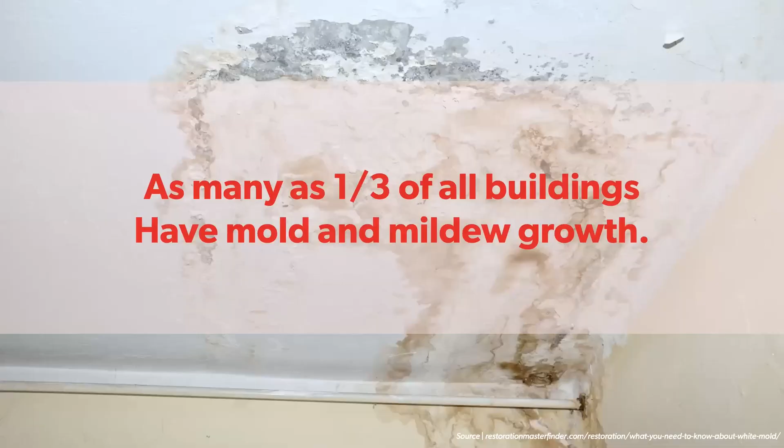Let's start by talking about where we stand with our buildings across Canada. Canadians, similar to most people in developed countries, are going to spend a lot more time indoors every year. More of our lives are lived inside buildings, and these buildings are really powerful shapers of how we live our lives, as well as things like our health and our well-being.

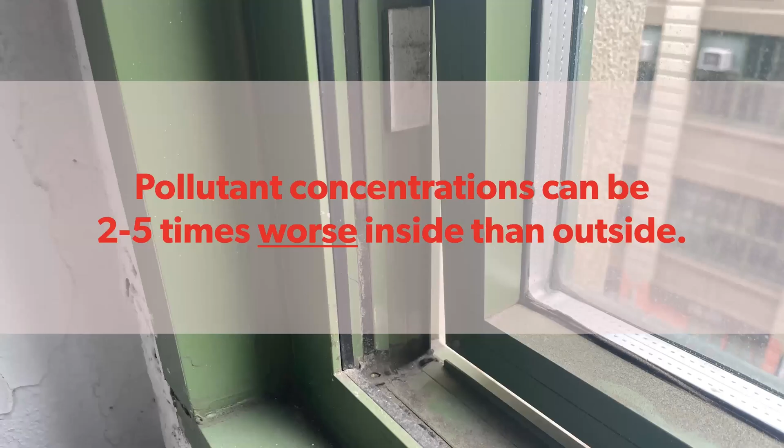Unfortunately, a lot of these existing buildings have a lot of problems. For instance, as many as a third of all buildings in North America have some mold and mildew problem. This is going to seriously harm the health of the occupants over time. Additionally, we normally think of our buildings as protection from the outdoors, but some studies have found that pollutant concentrations indoors can be maybe 2 to 5 times worse than outside, again seriously damaging the long-term health of the occupants of our buildings.

Sadly, more and more it's the case that the outdoor environment is also getting more challenging. In many parts of the country, pollutant levels outdoors are only going to make this health situation worse. Whether we're talking about industrial air pollution or smoke from wildfires, increasingly what we're seeing is that huge areas of Canada no longer have high quality outdoor air to help temper these indoor pollutant issues that we run into.

So we have lots of health problems, we know that, both inside and outside our buildings. We also know that far too many of our buildings are really terrible places to spend a cold winter or a hot summer, whether it's due to a lack of basic insulation and air sealing, or an old and inefficient heating and cooling system. Most people who've looked at this have found that as many as two out of every three homes in Canada report at least one room which is too hot in summer or too cold in winter, which is, I'm sure, not a surprise to anyone on this call.

Certainly, it's something that most of us have lived through. In my own experience down here in New York City, I lived on the top floor of a 4-story walk-up row house built in the early 1900s, a perfectly nice place. But of course, there's not a stitch of insulation in the roof. So when I come home on a hot, sunny summer day, the ceiling of my apartment is hot to the touch. It makes it incredibly unpleasant to be in that space and increases my air conditioning energy consumption. I'm sure many of us on the call here could tell similar stories.

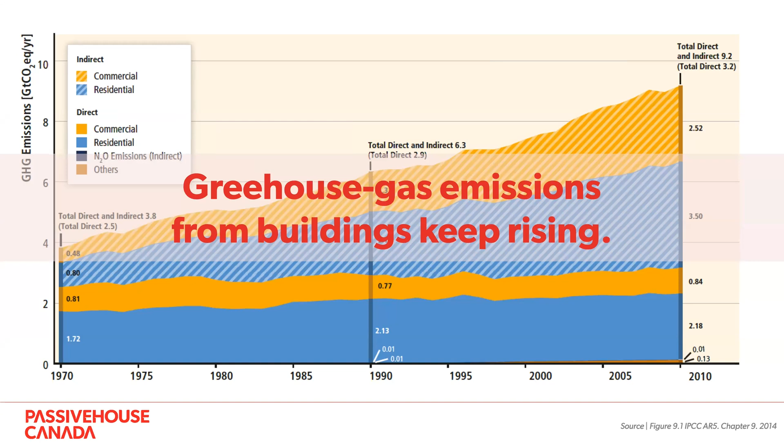So we have unhealthy buildings, uncomfortable buildings, vulnerable buildings, climate issues around our buildings, energy issues around our buildings, affordability issues around our buildings. Given all that, I think it's clear that Canadians deserve better buildings than the ones that we have. It's up to us in the building industry to help improve building performance in terms of health, durability, comfort, resilience. And the question those of us working in the high performance building sector have to wrestle with is: how do we do all that? How do we build these better buildings that are healthier, more comfortable, more durable, and eliminate carbon emissions from our buildings, all at the same time?

Now, luckily for us, we have some really fantastic technologies available to us as building professionals, whether we're architects, engineers, builders, or owners, that can help us deliver buildings which achieve exactly these results. So over the remainder of this session, we're going to take a look at a few different tools, techniques, and examples of some successful buildings which have achieved exactly the improvements that I've outlined already.

So let's start by talking a little bit about this passive house standard, what it is, what it means, and how we use it here in Canada and how it fits into this question. Now, the term passive house might be a new term to a lot of folks on the call, and it's worth taking a minute and talking about what we mean when we use that term.

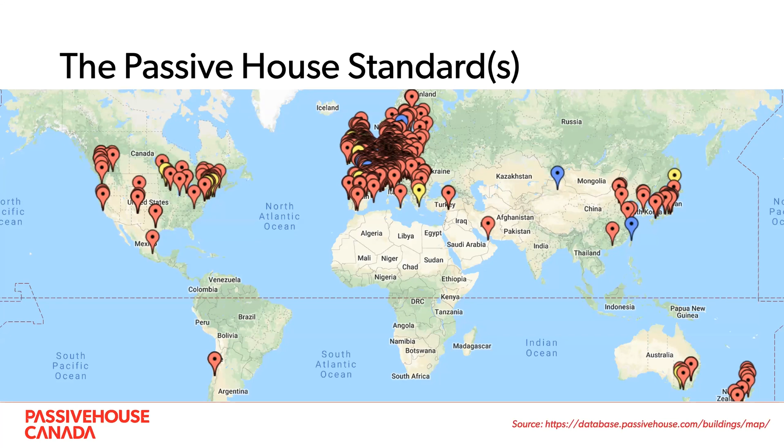Now, as a specific green building certification available for people, products, and buildings, the passive house standard has been successfully deployed on tens of thousands of projects around the world for 20, 30 years or so. The standard began in the early 1990s in Central Europe, and it's grown pretty rapidly worldwide since then. And here in Canada, we have a pretty vibrant passive house sector, mostly focused around the coasts, as you would imagine, but certainly expanding rapidly.

Now, as I said, the passive house standard can be applied to buildings, to people, and to products, and all of these different certifications are developed and overseen by a group known as the Passive House Institute, headquartered in Darmstadt, Germany. The certification, or the standard, is a worldwide global standard which can be applied to professionals, or individual building components like windows or ventilation systems, or whole buildings in any climate around the world. Now, we're here today to talk a little bit in depth about the retrofit standards that apply to these passive house buildings. So when it comes to buildings, the passive house standard has a tiered approach.

You can certify as any different type, either classic, plus, or premium, based on the energy performance of your building. That's for new construction. And then there's a whole specific retrofit certification which has been developed over the years to allow for the design, engineering, and certification of retrofit or rehabilitation of existing buildings. This is known as EnerPHit.

That sort of 'energy retrofit,' I think, was the original name—a portmanteau of energy and retrofit. It has been developed over the last 15 years or so with a whole host of specific tools and methodologies which are really helpful for those of us working in the retrofit sector.

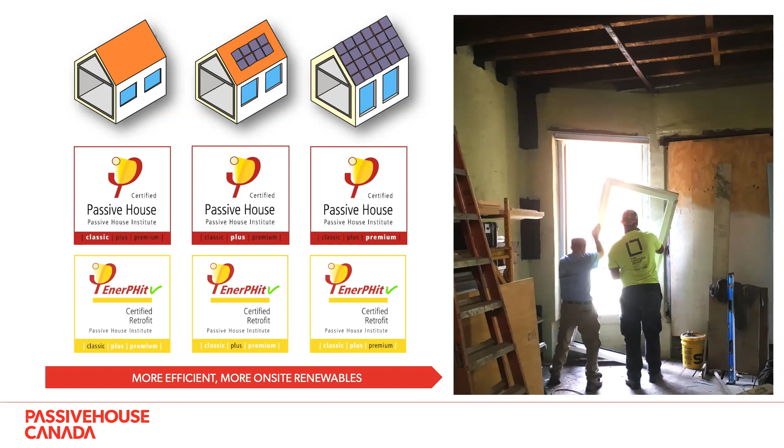We know we have a problem with our existing buildings, and we know there is this thing called the passive house standard with a retrofit approach. But what are the specific solutions a passive house building applies to take it from a basic existing building to a high performance, comfortable, durable, healthy, low energy passive house retrofit? We're going to use 5 basic strategies.

These 5 basic strategies are the same no matter what type of building we're attacking: insulation, air tightness, reducing thermal bridging, high quality windows and doors, and a dedicated ventilation system with heat recovery. This will be complemented by a 6th point, a high efficiency heating and cooling system, but today we're going to focus on those first 5.

We're really talking about the so-called passive elements of the building envelope. These are things that aren't going to break over time, aren't going to wear out—if designed correctly and built in, they'll just work for the life of the building. So we'll look at each in turn, but let's start with insulation.

I know what you're thinking—it's a perfectly nice day and here I am on a Zoom call talking about insulation. Not a very sexy or exciting topic, but the reality is insulation is probably the single most effective tool we have for improving the comfort and energy performance of our buildings. In passive house buildings, we use high levels of continuous insulation around the entire building, and that's no different for retrofits.

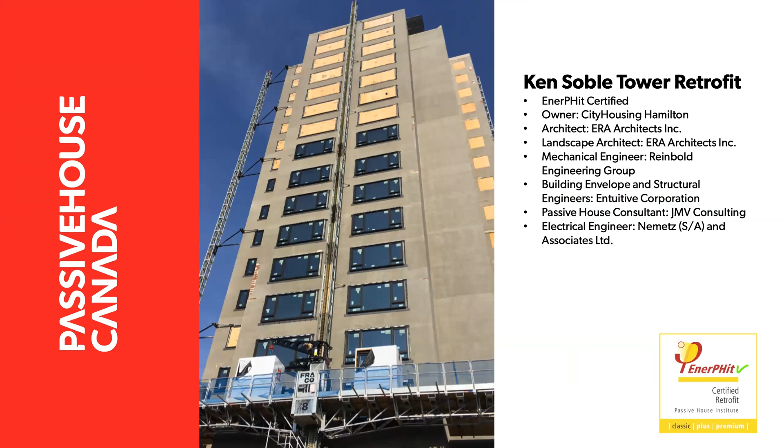This is a good example of a passive house retrofit: the Ken Soble Tower retrofit in Hamilton, Ontario. Here you can see the building under construction. This existing building is a great example of the type of thing we need throughout Canada—an 18-story building built in 1967, with terrible performance in terms of health, comfort, and energy, but a valuable existing asset that needs to be preserved, a piece of the community. How can we turn this into a building that actually serves its occupants well?

Well, they did just that in 2020—fully rehabilitated this building to the passive house standard. They replaced the primary elements of the facade with high quality components, replaced the mechanical and ventilation systems, and delivered a healthy, comfortable, low energy building. One of the key pieces of that strategy was to completely wrap the existing building in a thick layer of new insulation.

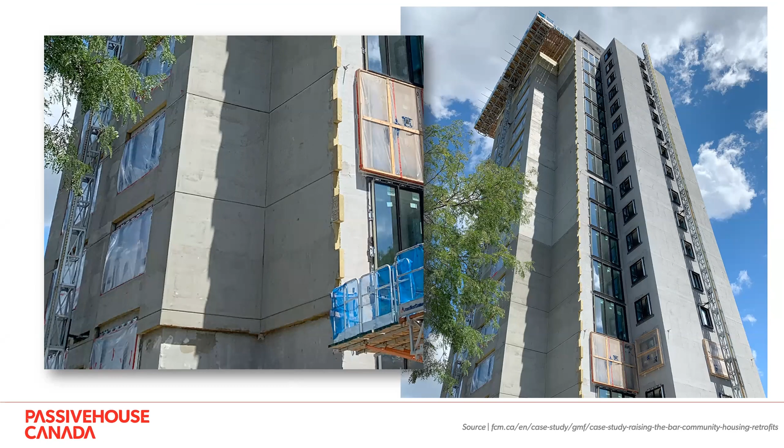Of course, this approach isn't going to be appropriate for every building—if you have a heritage facade you need to maintain, you're not going to wrap it in a new layer of foam insulation. But Canada has lots of buildings just like this one with completely unremarkable facades, which can easily be wrapped with a new layer of insulation, waterproofing, air sealing, and finish. This approach is core to any passive house mitigation or retrofit we undertake.

Now in Canada, when we insulate, insulation has to be paired with air tightness. And the primary role of air tightness in all of our buildings is to preserve the durability of the building. We want to make sure that we never have warm, moist air coming in contact with a cold, condensing surface. We want to make sure we never have any mold or mildew issues, or any health problems inside the building. So air tightness is going to be a critical piece of that effort.

Now, air tightness can be implemented on buildings in any number of different ways. And building an airtight building is really a team sport, as it were. It requires a combination of the specifiers, the product manufacturers, the designers, the detailers, and the builders all working together to make sure that they have the right products, that the products are being put together correctly using the correct applications, that the builders understand how to use those products, and that it's all done well. But you can use all sorts of different specific products in order to achieve air tightness. It just requires that the team select one set of products and then detail the building correctly.

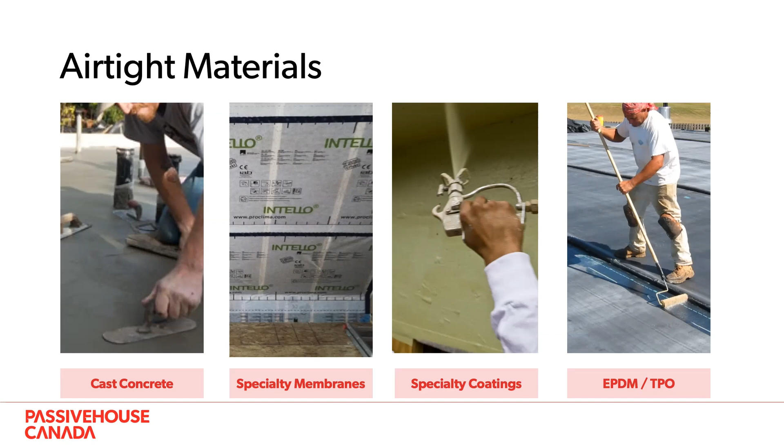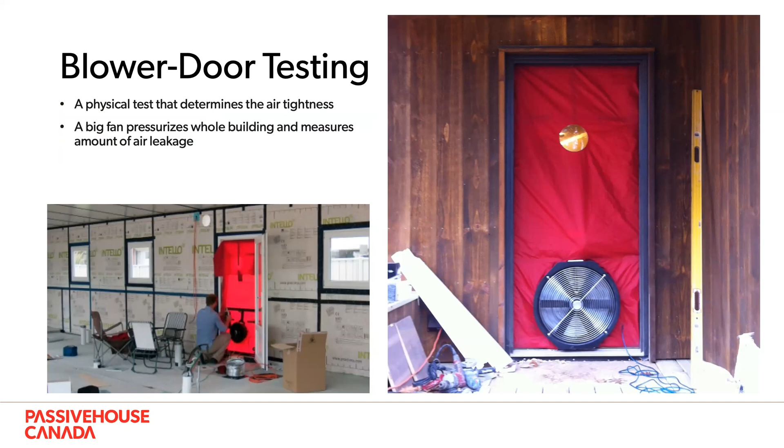In passive house world, though, it should be noted that air tightness is something which is verified. In typical scenarios, we might say we build airtight. Some building codes require us to meet certain airtightness levels in our buildings, but it's been very rare historically for those building codes to require any testing or verification. Now, the passive house approach is very different. We're going to mandate or require that the building is actually tested after it's built. So when it comes to airtightness, you're going to have to prove it. You're going to have to actually show that you did build the building that you said you were going to build. So we're going to insulate the building. We're going to build airtight.

Once we've done that, we're going to turn our attention to something called thermal bridges. Now, thermal bridges is a weird term, probably a new term for a lot of folks. The short definition of a thermal bridge is anywhere that we have a break or a disruption in the insulation layer. Now, this can occur for all sorts of different reasons. Could be the parapet, which penetrates through the wall and roof insulation. Could be a cantilevered balcony, which penetrates through the wall insulation. Could be something like a roof drain or a plumbing drain. Could be any number of different elements which penetrate through the insulating layer of the building.

What are the implications of thermal bridges, and why do we want to remove them or design them out from our buildings? Well, the primary negative impacts that we see from thermal bridges are cold surfaces. And cold surfaces lead to both discomfort and a higher risk of mold growth. So anytime that we have a thermal bridge, we're at risk of mold and mildew, wet materials, and of course, discomfort in our occupants. Add to that the extra heat loss that we see as a result of these thermal bridges during the wintertime. And you can see why we want to focus so much of our attention on designing these aspects out of our buildings and using the right products to ensure that we can eliminate as many of these thermal bridges as we possibly can.

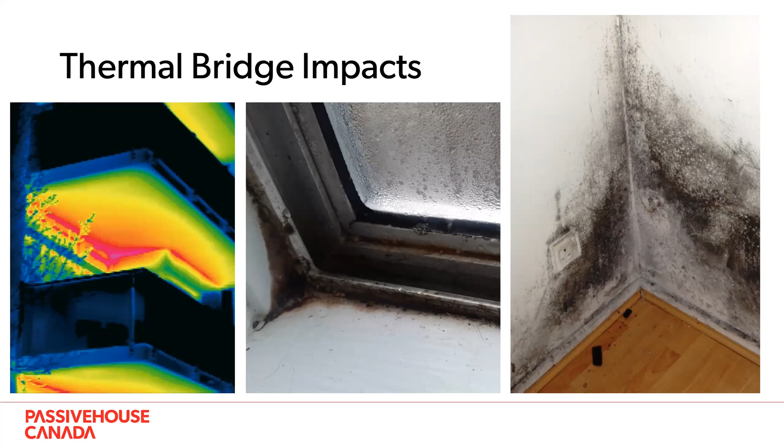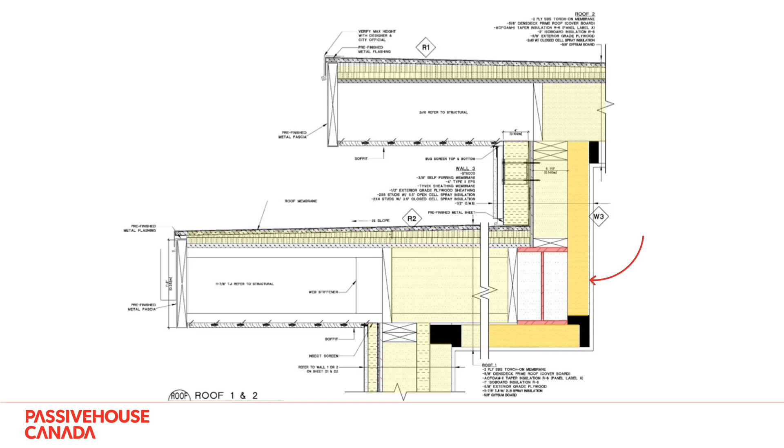So one of the things that characterizes passive house buildings is high levels of insulation in addition to their airtightness, and that's certainly obvious in this detail here. Now, the other thing we can say about thermal bridges when it comes to passive house design is that passive house designers are going to take a very careful and data-driven approach to mitigating and managing these thermal bridges.

Time was, we didn't have a lot of great tools for analyzing, simulating, and designing out these thermal bridges. Nowadays, with the advances in computation, that's not true. We have some amazing simulation tools, very easy for practitioners to get their hands on, which allow us to execute detailed heat flow simulations of all the details of our building and design out these thermal bridges from the get-go.

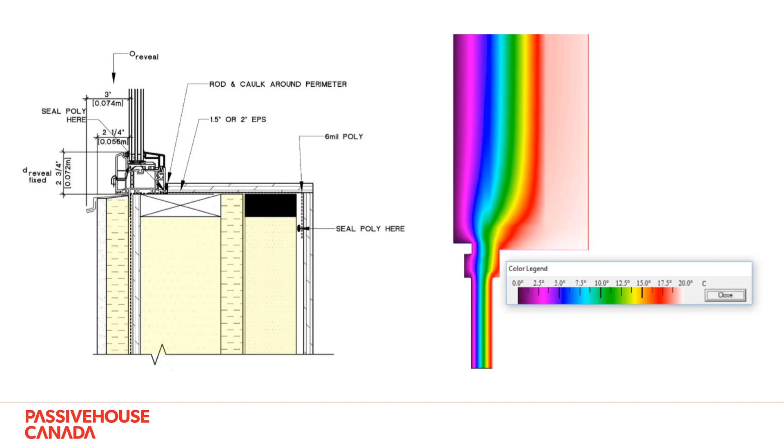What you see on the right-hand side there is a detailed false color image of the window installation situation of this project, and the colors show temperatures inside the wall as a result of a heat flow simulation. Using these tools, designers can figure out where the problems are and then mitigate them. We don't have to guess - we can use these technologies to figure out exactly where the problems are and make our buildings better.

Now that brings us to our fourth point here, which is windows - high performance windows. High performance windows are absolutely critical when it comes to designing passive house buildings, and retrofits are no different. So passive house windows, or passive house quality windows, are going to be absolutely required, and there's a few things that go into passive house level windows and doors on a project.

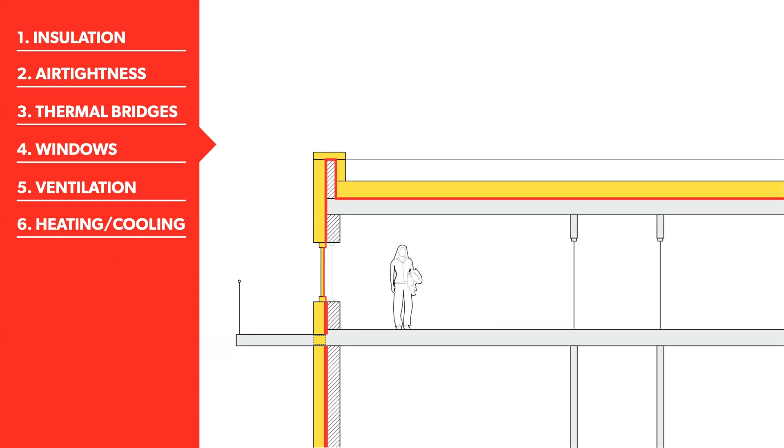If you've never seen a passive house level window, you might be a little surprised when you first come upon one. They're often quite a bit bigger than typical North American windows. They're going to be very highly insulated, very airtight, often featuring at least 3 levels of gasketing to ensure airtightness. They're going to be thermally broken, of course. And in most Canadian climates - maybe our friends in Vancouver, BC might be exempt from this - we're going to require triple glazing in order to achieve the performance levels we want out of our windows.

Now, in terms of the specific materials, there are passive house quality windows and doors made of aluminum, made of wood, made of PVC, made of fiberglass. It doesn't really matter - you can use any product under the sun so long as it meets the performance criteria.

One of the things we haven't talked about too much in regard to the passive house standard is that it's a performance-based standard. It is not a prescriptive standard - it's not a checklist of things you have to achieve. It's a performance-based approach: model the performance of the building, and so long as you're meeting your performance, you as the designer, specifier, or product supplier are allowed to use whatever methods, tools, or techniques you think are best for your building.

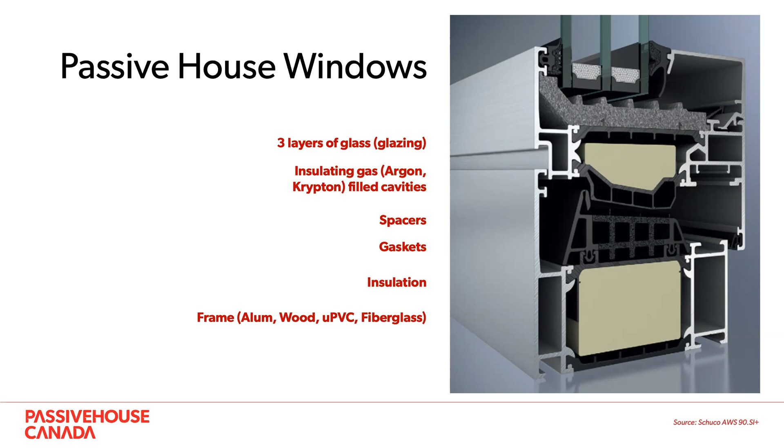This puts a lot of agency and control back in the hands of the designer. It puts a lot of responsibility in the hands of the designer, but puts a lot of agency back in the hands of the designer and builder as well.

Now, the other important thing about windows, again linked back to our performance-based approach, is the windows for a passive house building have to deliver thermal comfort. So they don't have to meet some specific level of some specific checklist, but they have to demonstrate that they can deliver thermal comfort passively to the occupants. And what that means, long and short of it, is that a window has to be good enough to maintain, let's say, an 18 degrees Celsius temperature on the interior face, even when it's really cold outside, let's say -12.

Now, for those of you in Winnipeg, that might not sound very cold, but for a lot of parts of Canada - think Toronto, think Vancouver - -12 might actually be quite challenging. And so in those conditions, our windows have to be good enough to passively deliver thermal comfort. What this means in practice is that what you don't see in passive houses is a bunch of radiators right underneath all the windows.

This is one of the other things that characterizes passive house buildings: tremendous freedom in heating and cooling distribution and system design. We do not have to put giant energy hog radiators right underneath all the windows to avoid condensation and discomfort when we design passive house buildings and use passive house level products like passive house windows and doors. So this is absolutely critical to a successful passive house building.

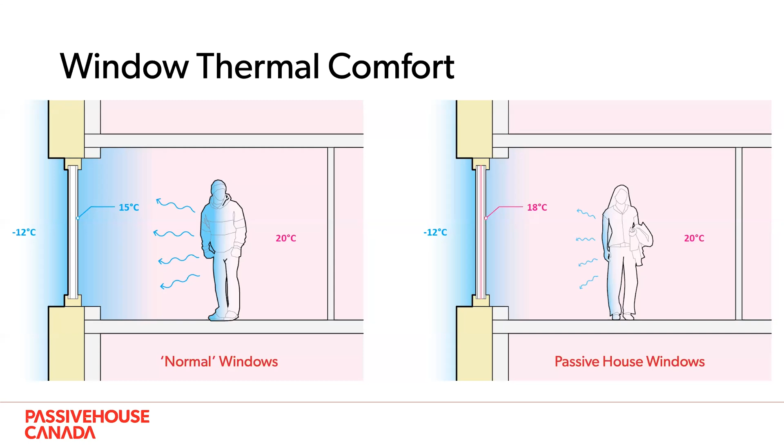Now, the last of our 5 points - insulation, air tightness, thermal bridges, windows - is ventilation. Ventilation, by my estimation, is probably one of the most important pieces of the puzzle when it comes to designing a healthy, modern 21st century building. What do we mean by ventilation? Well, let's talk a little bit about typical Canadian ventilation before we talk about passive house ventilation.

Maybe some of you on this call live in single family homes, maybe some of you live in apartments. But for those in single family homes, you might be familiar with a system like this one. So how do we get fresh air for people to breathe into most Canadian homes? We rely on a couple different mechanisms. First and foremost, we rely on the fact that most of our buildings are not built very well, so there's an awful lot of air leakage through the envelope, meaning we don't have to worry much about the volume of outdoor air coming into our building.

Now, as the air leaks through the envelope of your building and washes across desiccated bug parts and mouse feces and everything else, is that air clean by the time it gets to your lungs? Well, that's a whole different story, we can talk about that another day. But suffice to say there's plenty of airflow pathways for outdoor air to make its way into your home.

Now, you might also have some sort of outdoor air damper which feeds into your heating and cooling system, supplying some nominal amount of fresh air to the spaces, but only riding on that system. And then you might have an extract air system in the washrooms or kitchen, taking air out of those spaces and voiding it out of the building. So that's a very typical fresh air ventilation system for a Canadian or North American home - certainly we see plenty of this down here in New York State where I work.

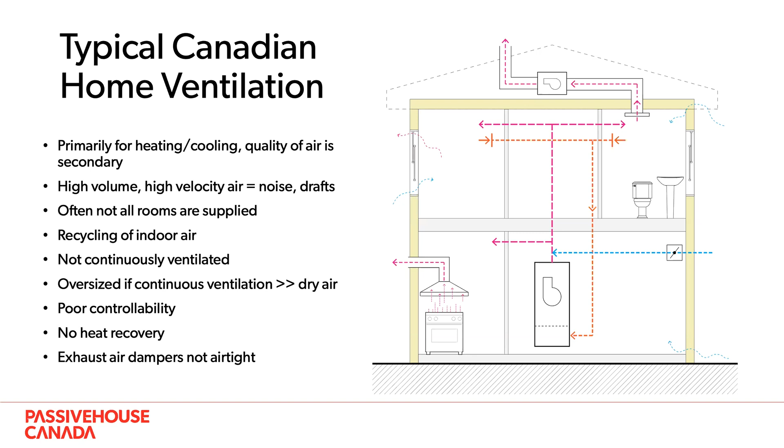Now, a passive house, by contrast, functions very, very differently. First of all, we have almost no air transmission across the envelope of the building. That means in wintertime, the cold air stays out and the warm air stays in. In summertime, the cold air stays in and the warm air stays out. We have a very airtight envelope.

And so we are going to use a mechanical ventilation supply - a machine to bring filtered, clean, fresh air into the building 24 hours a day, 7 days a week, 365 days a year. This same machine is going to extract stale air out of the home 24 hours a day, 365 days a year. What results when we configure, design and build a building this way is an incredibly healthy and comfortable home.

One where we have very, very high quality indoor air, constantly extracting pollutants out of the home and constantly filtering and supplying fresh air into all the main living spaces inside of the home. This approach leads to a much, much healthier interior environment for the people living inside of our building.

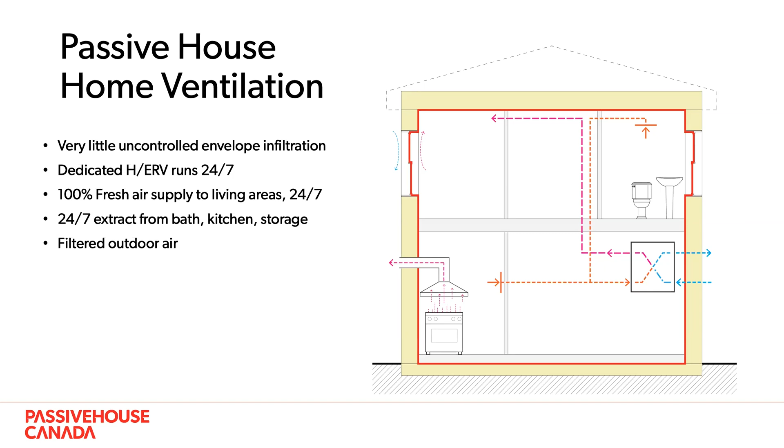It's also going to help improve building durability. It's going to reduce the likelihood of mold or moisture problems. It's going to radically change the way these buildings behave. Now, if you're not familiar with these machines, you soon will be - they're being written into virtually all northern climate building codes at this point. Certainly we're seeing this happening down in the States, and it's been code for quite a while in places like Ontario. These heat recovery or energy recovery ventilators are new gadgets.

They're new pieces of equipment that we're adding to these passive house homes. Now, these machines are not very fancy, they're in fact quite dumb - it's a foam box with a few fans in it and some high quality filters. All of the sophistication comes in two places: the controls, but more to the point, the heat recovery core of this machine allows us to take minus 12-degree air and bring it directly into the house 24 hours a day without paying an enormous energy or comfort penalty.

So this free heat recovery that happens inside of this machine is really where the magic happens. Other than that, it's actually quite a simple machine, but it is a new piece of equipment that needs to be added to these high performance modern homes that we're building here to the passive house standard.

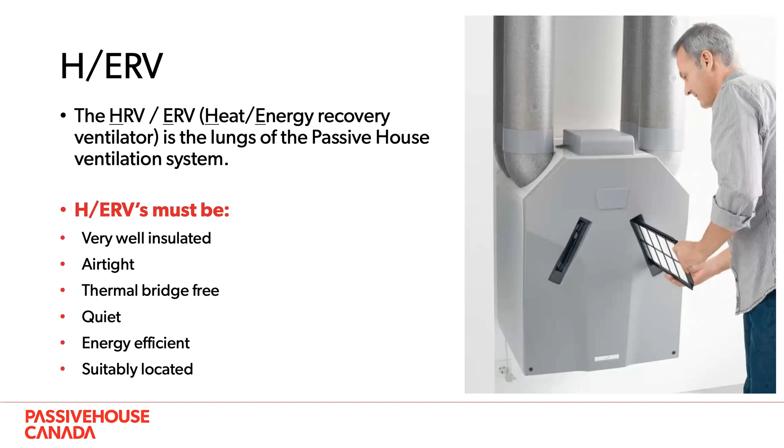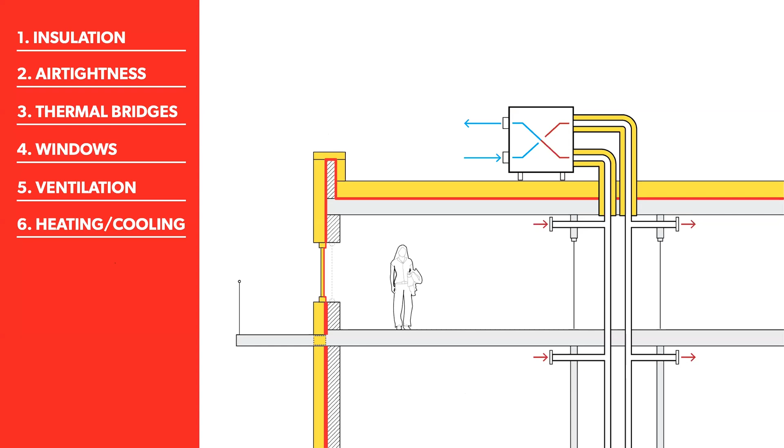So we put all those pieces together: we build an insulated building, we build it airtight, we design out all of those thermal bridges, we specify and install high performance windows and doors, and we add in a really high performance fresh air ventilation system. We complement that with a high performance heating and cooling system, and that's going to get us to that EnerPHit level of performance. So let's talk briefly about achieving that EnerPHit certification, and then we'll wrap up with plenty of time for questions and answers.

So how does one go about designing and engineering a successful EnerPHit project? Well, the first step is, as I noted earlier, to simulate the entire building performance. The passive house certification is a performance-based approach. It is not a checklist of things you have to do. You, as the architect, engineer, owner, specifier, are responsible for figuring out how to build the building.

This is one of the things I like most about the passive house approach: it allows me as the architect, as the engineer, to do what I think is best for the building. I'm not beholden or locked in to somebody else's notion of what a good high performance building is. There are very few, very clear, very hard limits on what it means to be a passive house. But so long as you achieve those, then you're a passive house, and you can achieve those in any number of different ways. But the way we validate that, the way we verify that, the way we design our buildings from the beginning, is by simulating the performance of the building.

And we're going to do that using a piece of software known as the PHPP, the Passive House Planning Package. It's a proprietary piece of software that we use to simulate the energy performance, thermal comfort, and durability of our building during the design phase.

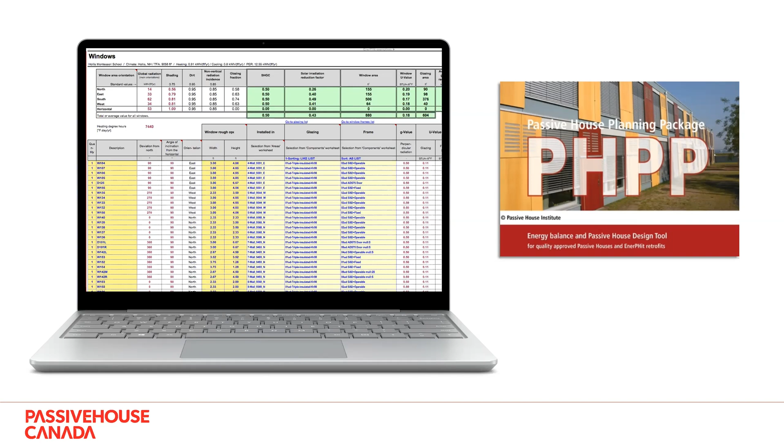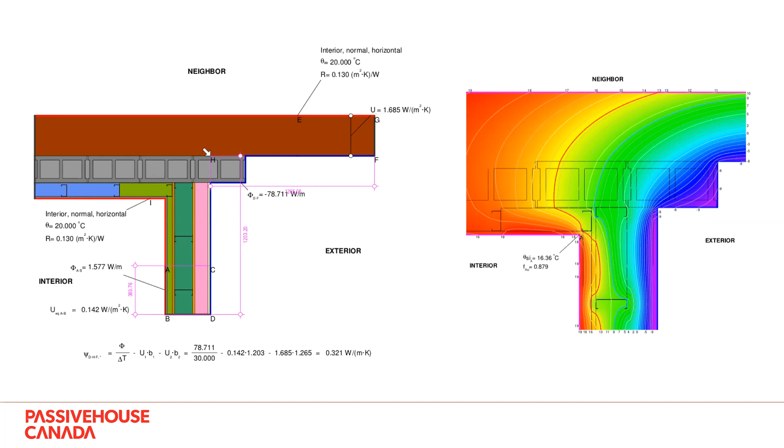As I noted earlier, we have a whole host of other amazing new simulation tools at our disposal as architects, engineers, designers, specifiers, when it comes to things like envelope design, hygrothermal analysis, moisture issues inside of our building assemblies, as well as heat flow simulations for designing out things like thermal bridges. All of these tools are now available to us, and we use them very heavily during the passive house EnerPHit design process to ensure that we're building the highest quality, smartest, best modern building that we possibly can, and that we're not introducing any unforeseen issues into the building fabric.

This is particularly important when it comes to retrofits. We need to be very sensitive and thoughtful about that existing building fabric as we start monkeying around, adding new insulation and new layers to those types of buildings.

Of course, all those tools are worthless without the education to use them properly. And that's where somebody like Passive House Canada comes in. Passive House Canada, the group we're here representing today, is an amazing group of practitioners and dedicated folks up in Canada, working across the nation to provide education and resources to those who want to learn how to build these modern high performance buildings. Passive House Canada maintains a whole ecosystem of different types of training, both live in person and on video, as well as on-demand video trainings through their website.

So if you're interested in any of that, I would highly recommend you check out the Passive House Canada website. There's a tremendous amount of really valuable education available there through Passive House Canada, which is really important to anyone who actually wants to achieve a high performance passive house building. The knowledge of these various tools and techniques is critically important and can't be ignored. So Passive House Canada is really an important piece of the puzzle there, for sure.

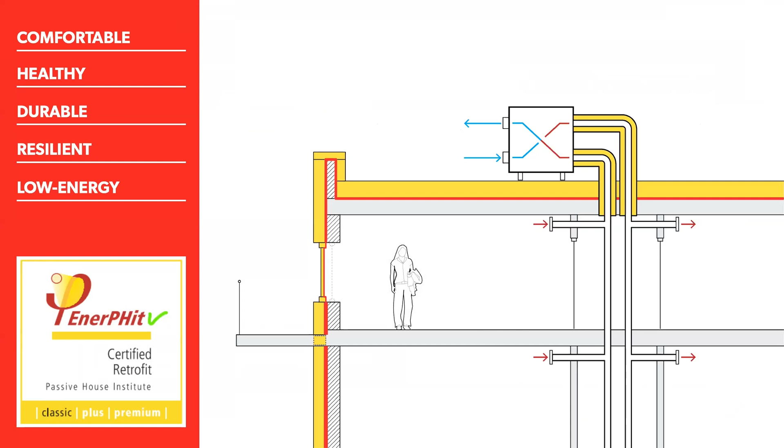We're back. The internet, right, the gods of the internet have decided that I can carry on. You know, the chance of your internet crashing is directly proportional, I think, to the importance of what you need the internet for. So I apologize for technical glitches.

So thank you very much, Ed. As always, thank you for a really great overview about what Passive House EnerPHit is and the Passive House principles. My thinking is that in the months and years ahead, as more people come into stores to inquire about retrofitting their homes or buildings, contractors may be coming in looking to do deep energy retrofits for clients. Passive House is the way to go. It's been wonderful to introduce folks to the Passive House principle when it comes to EnerPHit retrofits, so that you're a little more prepared. A lot of the products you see today are already available, I suspect, in your stores.